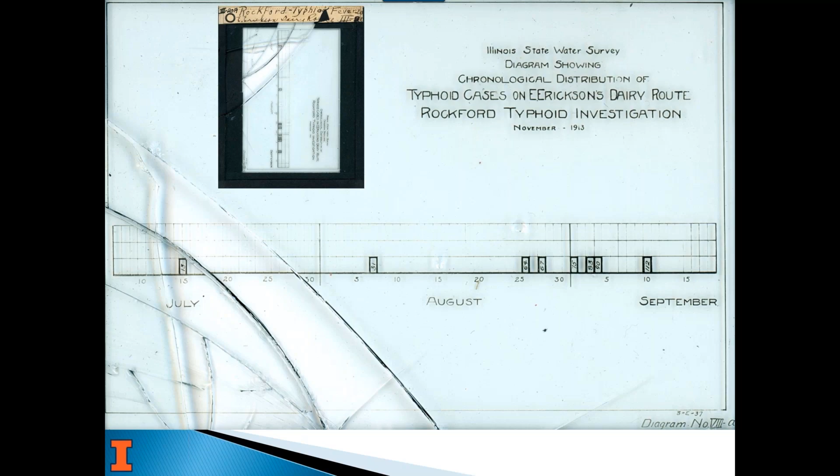We still do some of these types of projects. We're actually sampling some wells in Illinois for Legionella and lead, two separate projects, trying to get a handle on what kind of risks those might be for private well owners.

So what we're here to talk about today are private wells. Private wells aren't regulated after they're constructed, in general, in the country. There are a few local health districts in the Northeast where they may have some more authority after the wells are installed, or when there's a property transfer. But in general, it's up to the owner and user of the well to be sure your water's safe and the system's maintained. Whereas for a community water supply, even one on groundwater, like Champaign-Urbana, we have a water system.

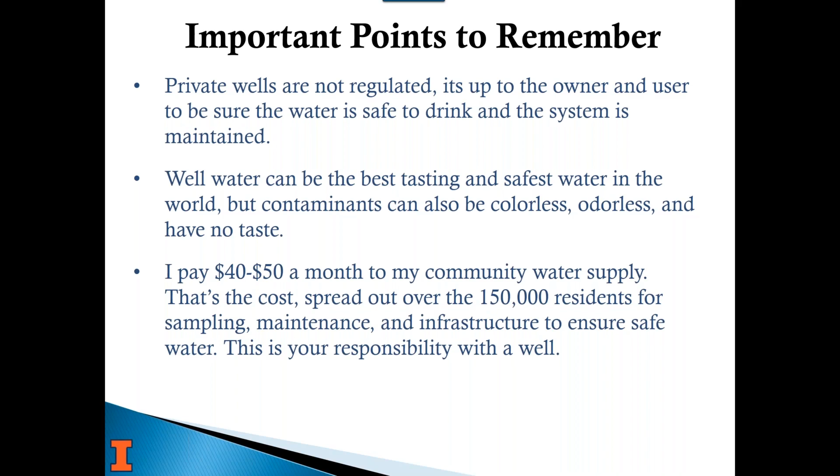But you need to do that for yourself. I grew up on a shallow dug well on a farm in central Illinois, and we had all kinds of problems. If it was a dry summer and we left a hose on in the horse tank, we'd run out of water. Or in the winter, if our power went out, our pipes might freeze because our pump was above the well, not buried in the ground. So there's just a lot of responsibilities if you're a well owner that you need to know and understand.

These are some of the big takeaways, if you will. You need to understand your well log, or your well, how deep it is, where the pump's set, if it has a screen or not. What type of well is it? Where's your water coming from? Is it coming from near the surface, or fairly deep? Well depth doesn't necessarily give you that answer, which I'll go through in a bit. You can have a really deep well that's still getting water from a shallow formation. So you need to understand those things.

As far as understanding if there are naturally occurring contaminants with your water source, your state agency, or maybe even your local health district or county health department, will know. For instance, we know there are areas in Illinois high in arsenic. Tazewell County is one of those. If you called the Tazewell County Health Department, they would recommend you test for arsenic, just because we know there's a lot of it in that particular aquifer that folks are using.

The other point of our class is to teach you enough about the basics related to your well, how it works, the geology, and how contaminants can get into a well, so that you learn to ask better questions, the right questions, and understand what your local sources of information might be, whether it's a driller, extension, a county health department, a lab, or a state agency like your state geological survey, your USGS office, or in Illinois, the water survey. The more you learn about your well and talk to folks who are interested in helping you, the better off you'll be.

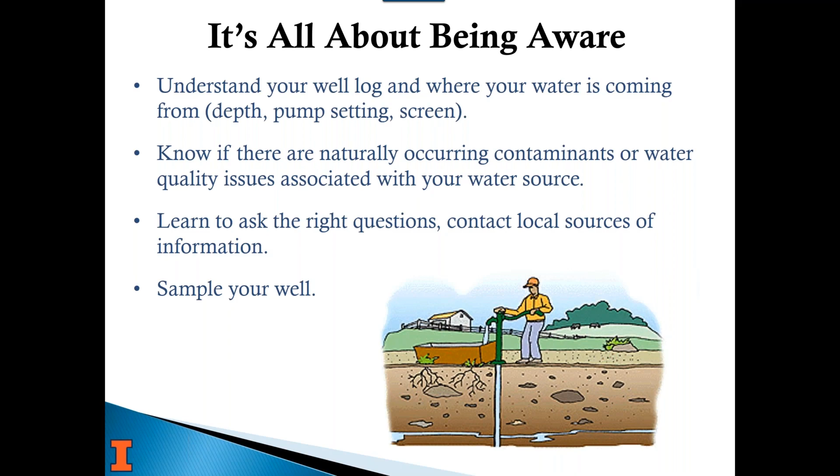So we're going to do a little bit of a geology lesson to start out today. This is about groundwater and wells. Porosity is one of the major terms used in describing how much water there is in a groundwater system, an aquifer, as well as how it might move through that system. If you had a box full of sand, the porosity is the volume of pore space, the area between the sand grains, divided by the total volume.

The best way to explain it: if I have a jar of sand that's full of fine sand, it might look completely full, but it actually has a porosity of nearly 30% if it's uniform sand. That means if I have a 100-foot thick aquifer of uniform sand and it's full of water, if I took all the sand away, there'd still be 30 feet of water there. A sand and gravel aquifer that's porous like that typically is a very good water supply if it's thick and completely saturated. It also depends on the size of the grains, how easy it is for water to move through that material. So that's a sand system.

A bedrock system, a fractured rock system, is different—water doesn't come from the rock itself. If I have a piece of granite in my hand, it has zero porosity, right? It's not the rock that's providing or storing water, it's the fractures in the rock. Now, one type of bedrock, especially sandstone, can have secondary porosity. You can have water stored in sandstone. It's not very much, but it provides a little more. It's basically cemented sand.

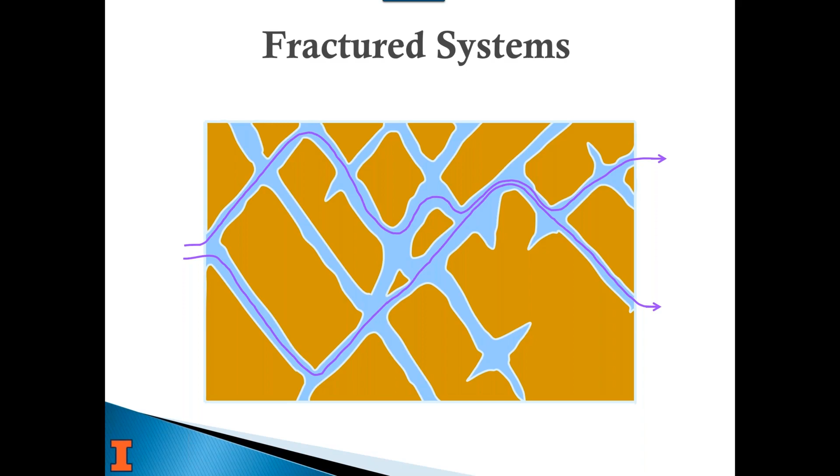But in general, water flow in bedrock aquifers is through the fractures. You'll see when we get to the part about how bedrock wells are built that this really matters. It's why you can't have a casing all the way down to the bottom with a bedrock system, because then the fractures get cut off as well. So, unconsolidated is a term meaning loose, like sand and gravel, and consolidated means rock.

Versus caverns in limestone. We have a lot of limestone in Southern Illinois, Indiana, Tennessee, Kentucky. It's where Mammoth Cave is. The limestone is more friable as far as it can be dissolved by water, and so that's why you have sinkholes and karst aquifers. You hear about that sometimes. That's usually limestone that's been weathered, and that's how caves are formed, and some of those are full of water, and so that makes them more interconnected and larger. But it also means that when you have a sinkhole at the surface, it's going straight down into that cavern, and it's causing contamination. So we see, for instance, Pike County, Illinois is all karst.

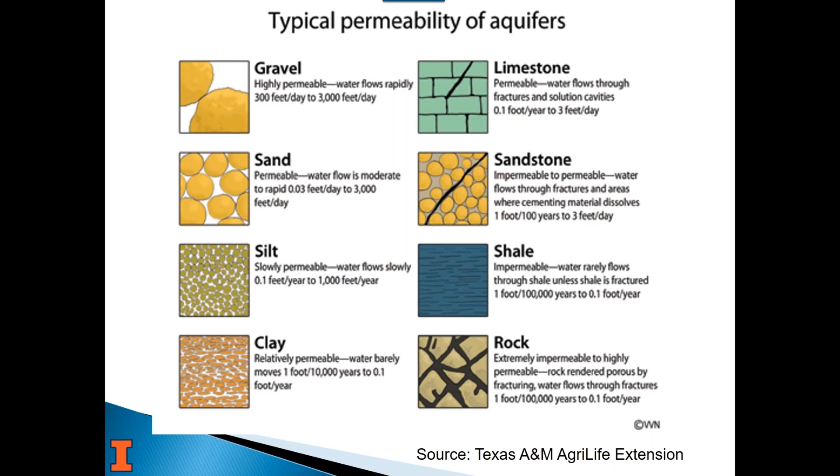And then, again, you're dependent on fractures, and this just gives you a range of how fast water can move through a system, just to give you an idea.

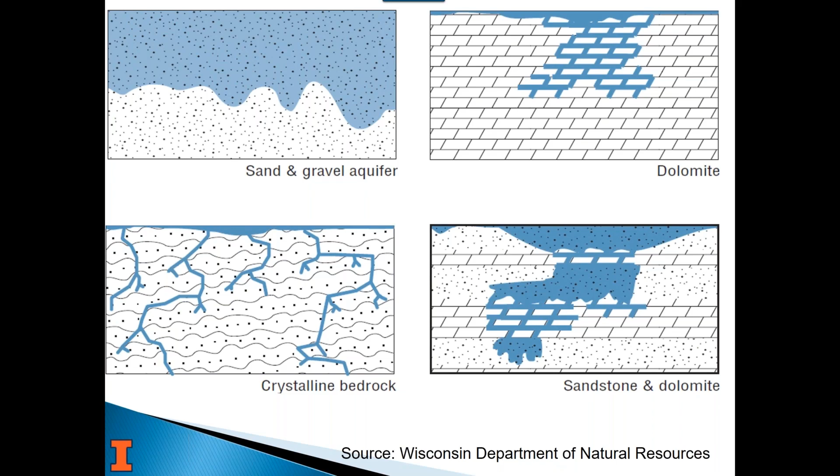But in real life, there's layers in bedrock, so sandstone and dolomite this shows, and this is still an idealized representation. Most geologic units in bedrock are not flat, they're angled one way or another, and they're not uniform thickness. They can be very thick in some places and very thin in others. And so that's why when you drill one well in an area and you hit 40 feet of sand and there's plenty of water, you could drill a mile away and there's no sand. Just the geology can change that fast.

You may not be familiar with it, but down by St. Louis, Missouri, that's the Mississippi. There's a moraine or a drop off about 8 miles from St. Louis in Illinois. As you're driving towards St. Louis, you drop off nearly 200 feet, and that's where the ancient Mississippi bank used to be when the glaciers were melting. It was 8 to 10 miles wide, and now it's less than a mile wide. You can see any river bottom, as you're driving through, you come down into the bottom ground of the lowlands around the river, that used to be all full of water and flowing. So when all that melting stopped, it filled with sand. That's why you have the glacial drift.

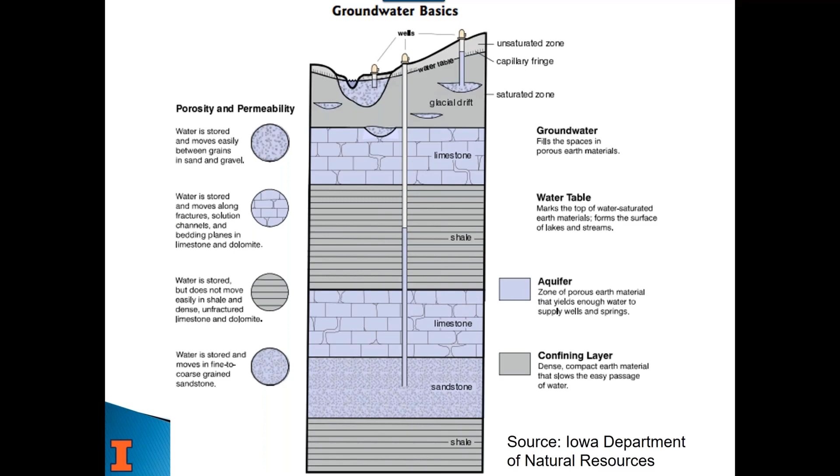So the shale again acts as a confining layer, and that's why water levels do what they like to do.

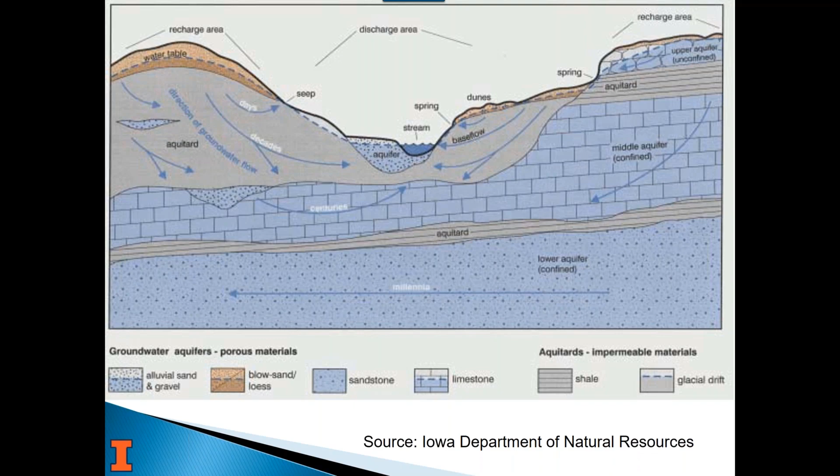And so that's why if you have some kind of water quality problem in a well, if it's in the aquifer itself, like arsenic can be, it's naturally occurring, you can't just treat your well and expect it to be okay. And that's a bad example because you don't treat the well, you treat the water. But it's always flowing, so more water's flowing towards your well. And then when you pump it, you lower the water level and that causes more water to flow to the well. Okay, so as far as aquifers and wells, there's really three types of wells.

The way we look at this, there's dug and bored wells, which are large diameter, and typically those go in where there is no real aquifer. So you don't have sand and gravel that makes up an aquifer, or you don't have bedrock that either has enough water or has water of a quality you can use. An example of that, in Southern Illinois, we have bedrock maybe 300 feet below land surface, and where there's plenty of water, it's all salt water from an ancient lake. The TDS is like 10,000, so it's salt water like ocean water. It's expensive to treat, so it's really not used as a water supply.

So in the southern third of Illinois, there are two major lakes that provide water to 15 or so counties and all the public water supplies. For the private well owners, they either have a dug or bored well, a shallow well, if there's enough material there to have a water table above bedrock, or they have a different source, a cistern, or they haul water, or there are a lot of rural water districts that have developed in southern Illinois because there's no good water source.

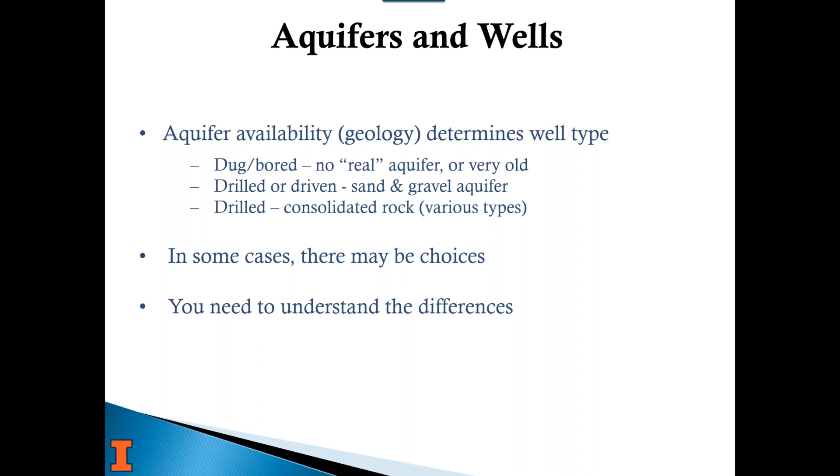For instance, a good example is in Wisconsin, there's one geologic unit that has very high arsenic, in the thousands, where the health standard is 10. So they passed a law that says you have to stay above that unit, or if you're going to drill through it, you can't finish a well in it. And if you're going to drill through it, you have to case it off so there's no chance that water from that unit can get in your well. So there's better water below and better water above, but this one unit is just very high in arsenic because of the source grain material that makes up the aquifer. It just depends on where you live, as a bottom line.

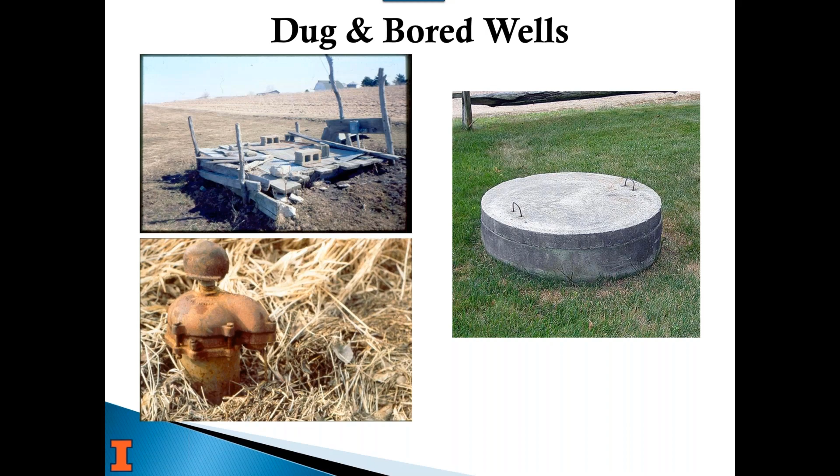Versus the well on the bottom left is also a large diameter well, but it has a riser pipe. So this concrete pad that you see on the right is 10 feet below land surface in the other example. And then there's an opening for that pipe, and you're able to fill that all in with clay and reduce the amount of opportunity for shallow infiltration to get in the well.

Water seeps in slowly. There's typically not enough water available. Most of this is fine textured material, which water can move through slowly, but that's it. So you have enough storage that when you use the water in the morning or in the evening, it lowers the water level in the well, and then it sits overnight or during the day when everybody's gone, and it fills back up. So the reason you have it 3-foot diameter or sometimes larger is just because it's like a cistern. It's meant to store water that seeps in slowly from our surrounding areas.

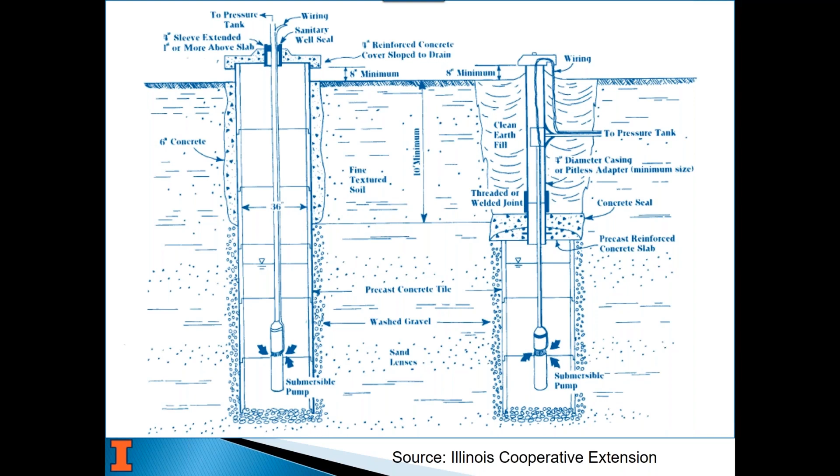So the other design on the right is where it looks like a drilled well at the top. It's got a regular well casing. In this case, they've got a pitless adapter, and this is an area where it'd be freezing. Then there's a concrete pad at 10 feet or lower, where it's still the same large diameter well where water can seep in. It's just done in a way that you put clean earth fill in the upper 10 feet above that concrete pad, so that there's less chance of surface material seeping down and getting in the well.

Okay, sand and gravel wells. So a sand and gravel well is finished in a sand and gravel aquifer, which is why you have a well screen, and this little picture here is a stainless steel well screen. So the screen lets the water in but keeps the sand out, okay? And so here's a diagram of what that looks like. Usually you have a well pump that's in the well, and water seeping in from the sand.

And when you start pumping this, the water level will drop in the well, and then water from the surrounding area, because it's at a higher level, is going to flow towards the lower level, like I mentioned earlier, and try to fill that back in. So because of the porosity of sand and gravel, it keeps filling in the well.

A lot of times you see in irrigation systems along river bottoms or in sandy areas, they're pumping 1,200 or 1,500 gallons a minute. So a lot of times the sand and gravel aquifer is very prolific.

The screen can be stainless steel or PVC. As far as screen size, the slots between each woven strand of stainless steel are sized based on the sand grains you find when you drill. You drill this well, catch the cuttings as the material comes up, and determine how coarse or fine the sand is, then size the screen appropriately so that it keeps the sand out but lets the water in. If you're in coarse gravel, you can have bigger slots. If you're in finer sand, they've got to be very narrow slots.

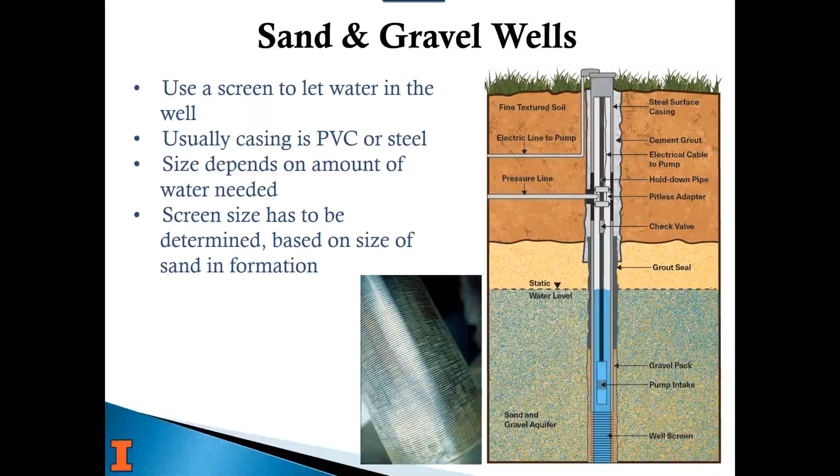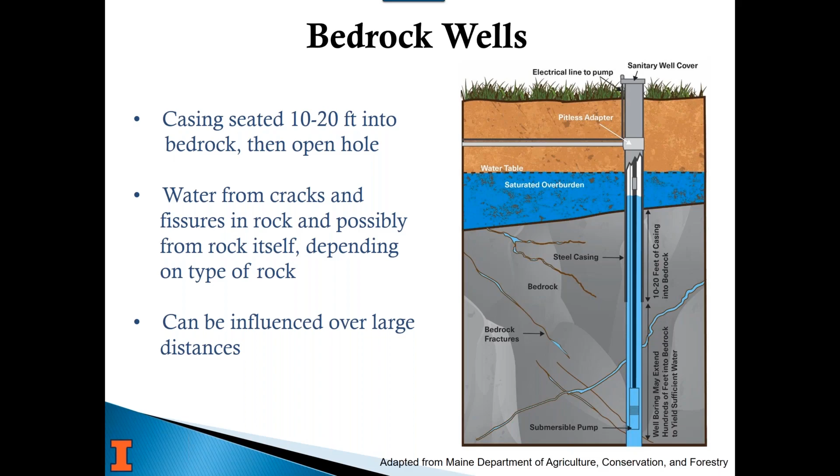And here's a bedrock well. You can see that if we look at the formation again, they had clay and a little bit of sand, then broken limestone at 189, and then 68 feet of limestone. Then they hit shale, so they basically stopped—they went 3 feet into shale and stopped.

If you look at number 15, they used 179 feet of PVC and then 20 feet of black steel, and they put the black steel at the bottom, 10 feet into the bedrock. The bedrock started at 189, so they went 10 feet into the rock and seated that steel casing, then put PVC on top. That's because PVC is easier to break, and when you're seating it in the rock you have to use some force to make it solid. So that's a typical way to save some money for the well owner—PVC is cheaper than steel, is the bottom line.

You can see here that the static level was 130 feet. When they pumped it at 25 gallons a minute for 2 hours, it dropped to 160 feet—still plenty of water, right? In fact, if you look at number 5 over here, in the end they put in a 12 gallon per minute pump, and they only set it at 160, because if you're pumping it half as hard, the drawdown is going to be less, so it shouldn't be an issue.

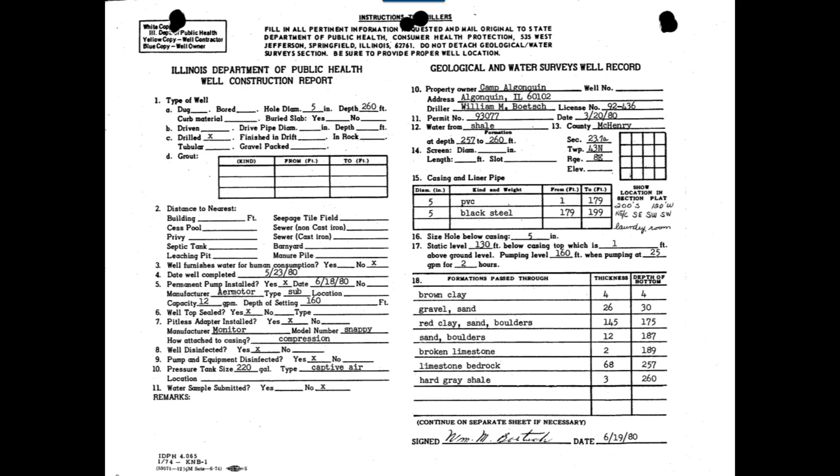Okay, so there's lots of issues. That comes down to really these things: public health protection, that's first and foremost, as well as source water protection, meaning protecting the aquifer and water supply you're using, and then understanding the water quality of the water you are using, whether that's a health concern or an aesthetic concern. Those are the things we really need to be concerned about.

There are tons of issues like drought, flooding, contamination, PFAS today that are in the news. And when those things happen, we tend to get more emails and requests and questions from well owners.

When people hear there's a boil order for a community, some well owners will even call the community and say, do I need to be worried about my well? It actually has nothing to do with their well, but some folks just don't get what a boil order is really for, and they assume it could mean the same aquifer they're using could be part of the problem, and it's not.

So those things are a moment though for all of us. If we get a call from someone, it's a teaching moment where we can explain more about it, explain other opportunities like our private well class, or if you have information of your own to provide to a well owner—and I'm talking to the professionals in our group here—it's a chance to at least explain all that information.

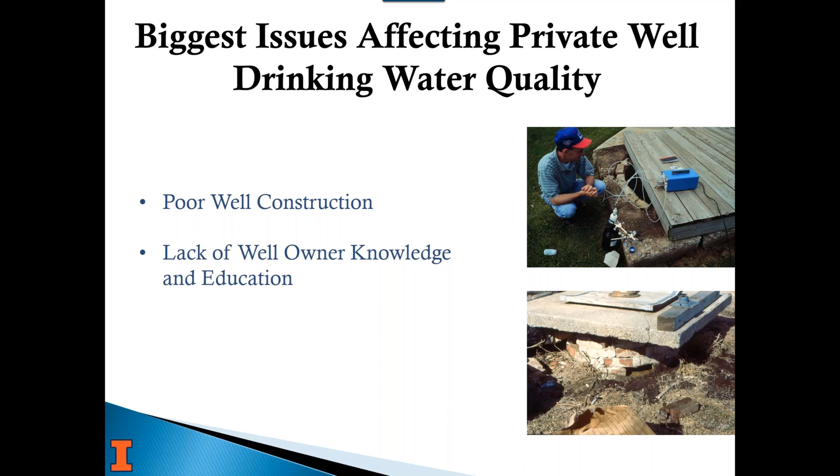And so we have that issue, where those old wells tend to be the ones where we have the most issues. It's also that a lot of folks who are on private wells just don't have the knowledge or education on how to be a well owner. We see a lot of people who call a community when there's a boil order. I've had community water operators tell me they've had well owners call them thinking they were on city water and not realizing they had a well in their front yard, and that's happened literally a bunch of times. Becoming more knowledgeable about your well and knowing the basics is really critical to keeping your water safe for your family. That's kind of the message today.

As far as old construction, if you can, you should correct it. Well construction codes have changed significantly in the past 30 plus years, but every existing well is grandfathered in. We still see wells in pits, we still see hand dug wells. The well I grew up on, my grandpa hand dug in 1933. It's only 14 feet deep, at the bottom of a ravine where water can run towards it from three sides, and it's in a pasture. It was never safe.

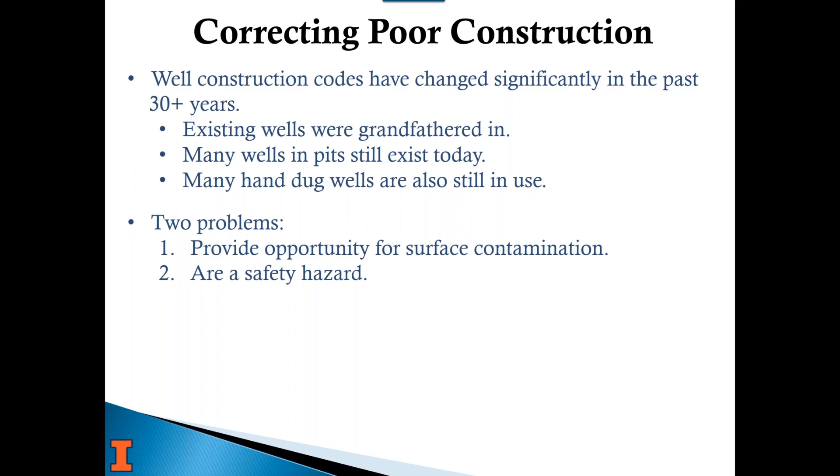My body got used to that water. When I came to college I started drinking city water that was chlorinated. I went home at Christmas and our well water made me sick. You just don't realize those things, but they're not safe. So not only are they a chance for contamination from the surface, but they're also a safety hazard.

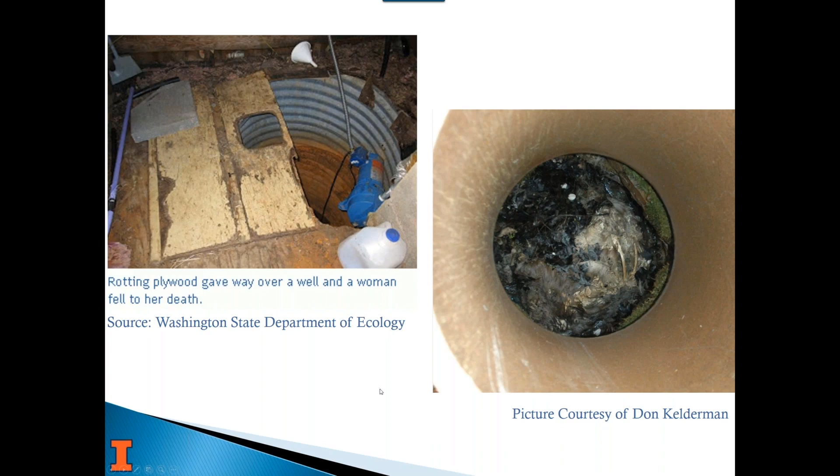So what should you do with these wells? Bring them up to code if you can. You can find out what the code is from your local health district or county health department, or it should be online with your state agency. Every state has a well construction code except two, Pennsylvania and Alaska, and Alaska's state agencies are all working together - they have a work group trying to change that. But even so, if you don't have a jurisdiction with recommendations for best practices or a well code, use somebody else's. Every other state does, and it's just the safer thing to do.

So, if your well's in a pit, extend the pipe up to the surface, and fill that in with clay grout or cement so that water can't seep in.

If you have a well in a pit, which we ran into back in 2011, I hired 4 geology students to inventory wells in 9 rural townships in a farming county of Illinois. They found 1,708 wells. We only had logs for about 750 of those. But we also found 40 wells that were still in pits.

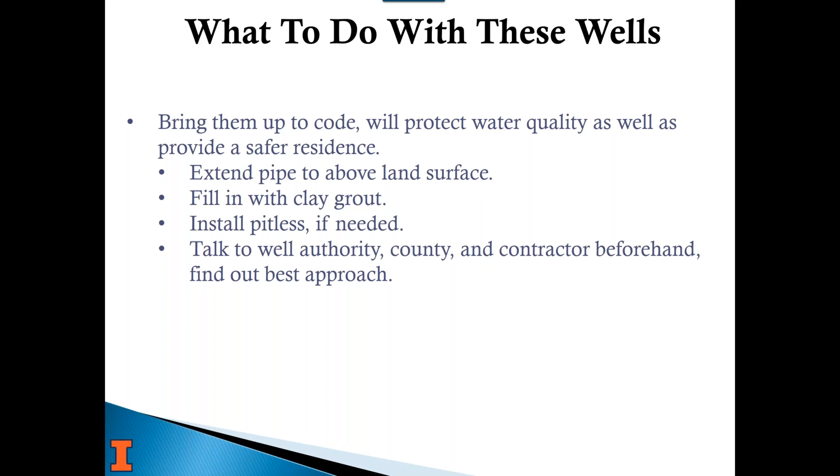Talk to a well contractor, your county, or even your extension about what to do to make that safer. The same thing goes for abandoned wells - there's probably as many abandoned wells out there that aren't used and need to be properly abandoned as there are wells that are actually in use. Because well logs weren't required in most states until sometime in the 60s to 80s, there's a lot of old wells that we don't have on file. The well I grew up on isn't even in our records here.

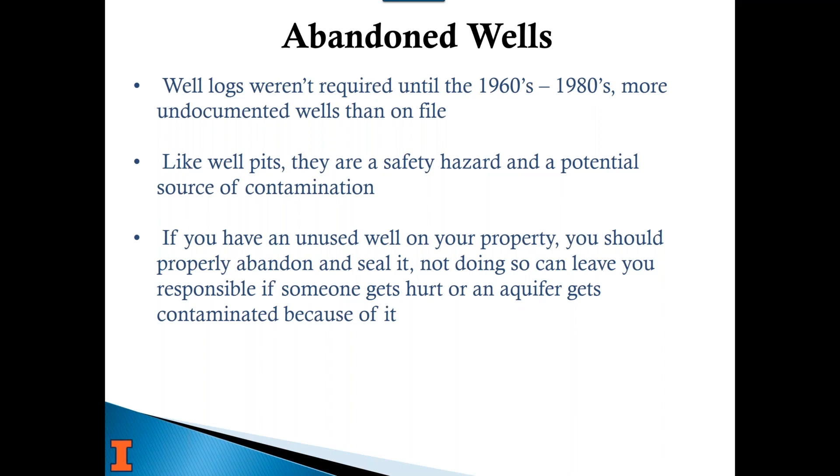Like wells in pits, old wells are a safety hazard. If somebody walks on your property and falls in an old well - whether you knew it was there, but maybe the plywood you had over top of it is 25 years old now and rotten - you might be responsible if they get hurt or killed. Or people dump stuff down into it, since it's a nice hole in the ground, out of sight, out of mind. Well, if it contaminates an aquifer, you could be responsible. This happens more than you think.

Or you see where people get a tractor stuck, the tire gets stuck - a lot of things happen with these old wells. Okay, so we're going to talk a little bit about the difference between aquifers and aquitards and some of those things in water flow.

An aquifer is a saturated bed formation or group of geologic formations that yields sufficient quantity of water. In my field, they argue about what an aquifer actually is or isn't. If you have a very thin aquifer that you can maybe get 5 to 10 gallons a minute out of, that's an aquifer for a private well owner. But for a community that needs a 200 or 400 gallon per minute well, that wouldn't be an aquifer for them. So how you want to define that is really up to you, but it's basically a unit that provides water of sufficient quantity.

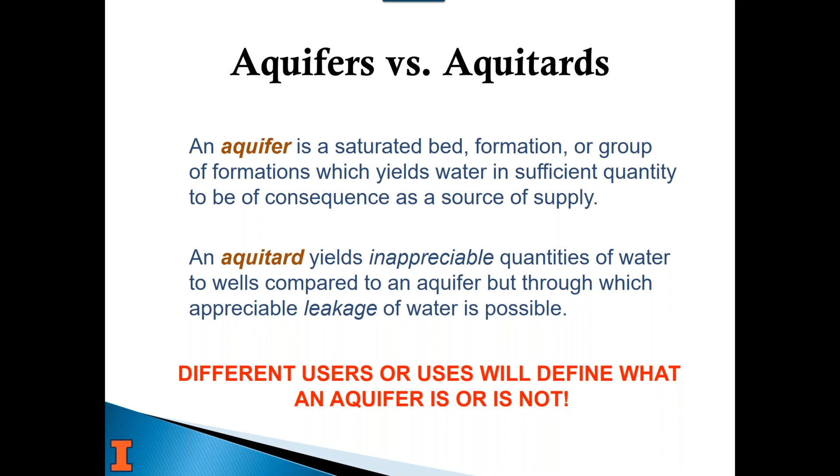That's versus an aquitard, which doesn't yield sufficient quantities of water, like silt, clay, or shale. It also lets appreciable leakage through, meaning it retards the flow of water. Different users and uses will define what an aquifer is or isn't - that's kind of the scientific definition. It's not a big deal as far as how you might look at it on your property. But geology is different everywhere - you're not guaranteed water just because you put in a well.

And so it's good to know what you might have available. If you really want to learn about the geology of your area, your state geological survey is probably the place to go. Or in Illinois, it could be either our geological survey or water survey. And I know from our own efforts, if someone calls us, we're more than open to trying to help them understand where they're at, what data we might have available, all those sorts of things.

So confined versus unconfined. An unconfined aquifer is where the groundwater has a free surface. So if we look at a jar of sand and we put water in just halfway up the sand, the top part of the sand is still not saturated, but there's a line where the water becomes saturated—that's the water table.

And the same thing happens in the ground. In some areas, if you're digging a foundation, you may have to get a contractor's pump and keep the water pumped out because the water table is really shallow, and even though it's not sandy material, it's still saturated. So water, when it infiltrates, reaches a point where it's saturated—that's the water table. That's not necessarily in a sand and gravel aquifer. The water table is the top of the aquifer.

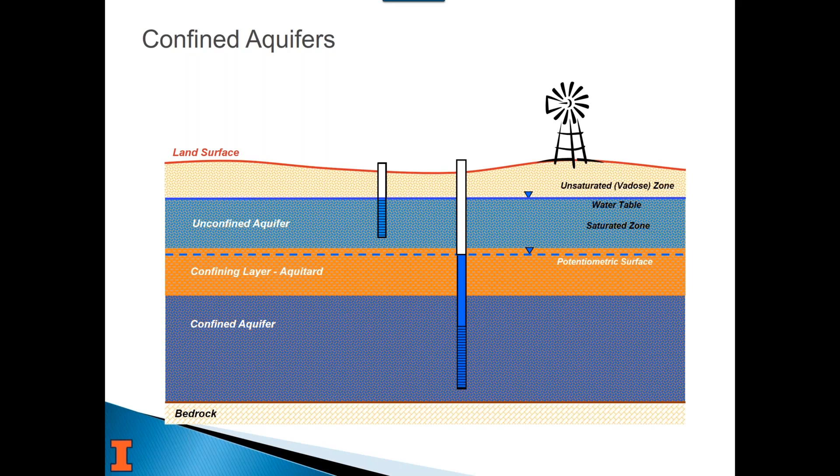So what that means is that confining layer, that aquitard—a clay or a shale, whatever it might be—the water level above it is higher than below it. And so there's a net movement, very slowly, through the aquitard going down. But it's also possible to have this reversed, where the deeper aquifer has a higher water level than the shallow one. Then the water is trying to move, because it's pressure, it's pushing up. It has more influence and it moves very slowly. It doesn't provide a lot of water, but it wants to be even—they want to be at the same level. And so that's what happens.

So here's an aquifer that's confined—that's what the little dashed lines mean. And there's a separate water table up there. But where it's black, and the little triangle is the water level, you have an artesian well because the water level's above the aquifer. So the whole aquifer is completely saturated, and it's got pressure on it. Think of it like if this was a big juice box and I squeezed it—water would come up the straw to a certain point. If I squeeze hard enough, it's going to come out the top, right? So it can be below the water table, it can be above the water table, or it can be flowing.

An interesting fact—Michigan has a really great handbook on flowing wells, called the Michigan Flowing Well Handbook. They were losing 28 million gallons of groundwater a day to flowing wells that weren't capped. So they passed a law in Michigan that every flowing well had to be capped, and that basically keeps the water from escaping on the ground. By doing that, you create water pressure in your line before you even get it to your pressure tank—it's kind of interesting.

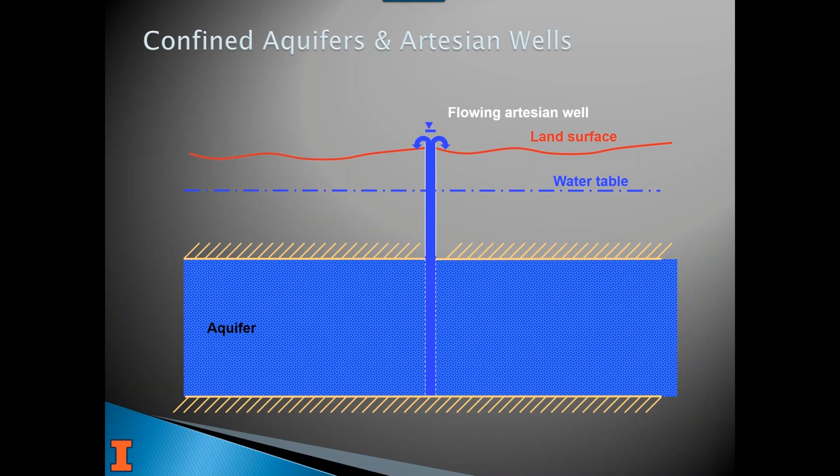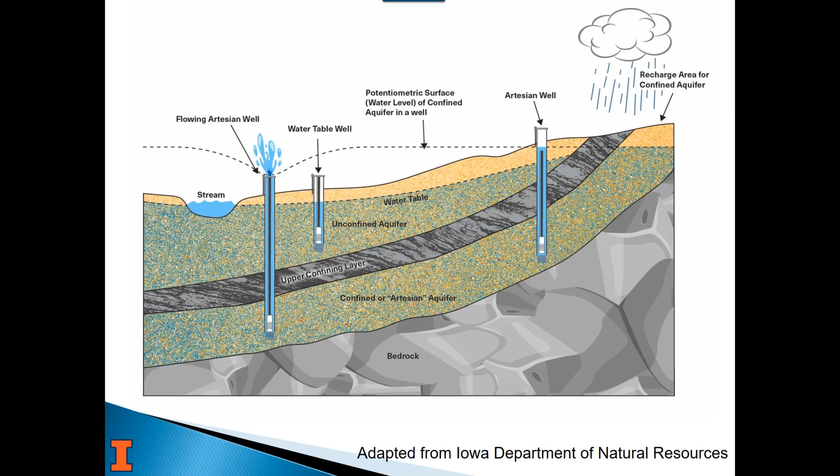So this is very typical along any major river. You can have more than one confining layer separating these aquifers, and because of that the water levels can be different, and it can be whether it's artesian or flowing artesian. That just means it's under pressure.

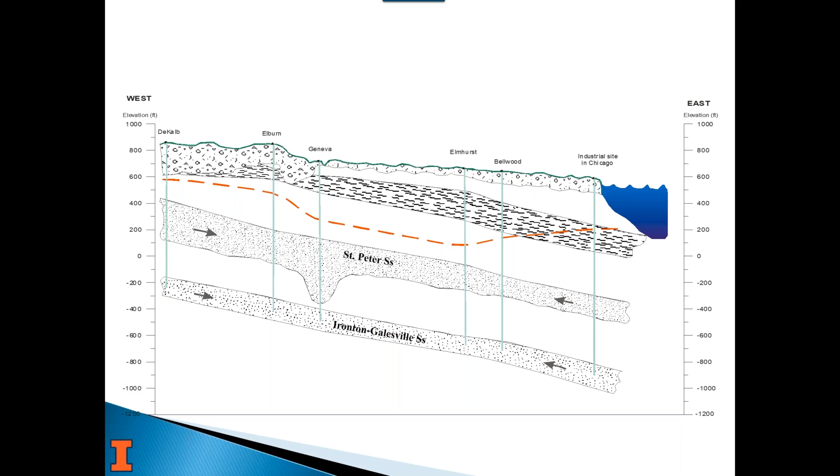When you pump water out of a well, you lower the water level right at the well, so everywhere surrounding it tries to fill in to make it flat again, like in your bathtub. That's why this looks like it does, and the water's flowing both directions. It looks like it's flowing downhill, but really it's flowing to a lower pressure.

So it might be very small, it might not draw down very much. We have an aquifer that's so extensive that when we pumped it at - 2 million gallons a day, that's about 1,400 gallons a minute.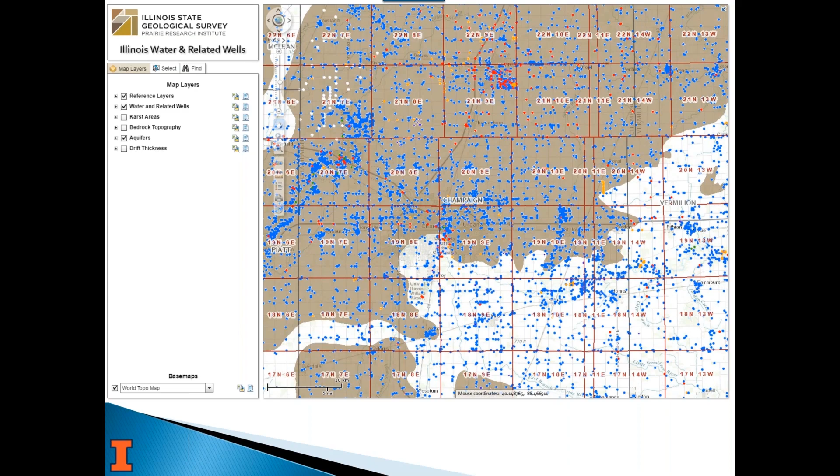If I zoom in closer and click on a well, there's actually 3 wells here, and I'm looking at the second of the 3, that's 269, by Willard Airport just south of town, drilled in 1959. This says it's 269 feet deep, and there's an API number, which is the Geological Survey's number, and then the Water Survey also has a P number.

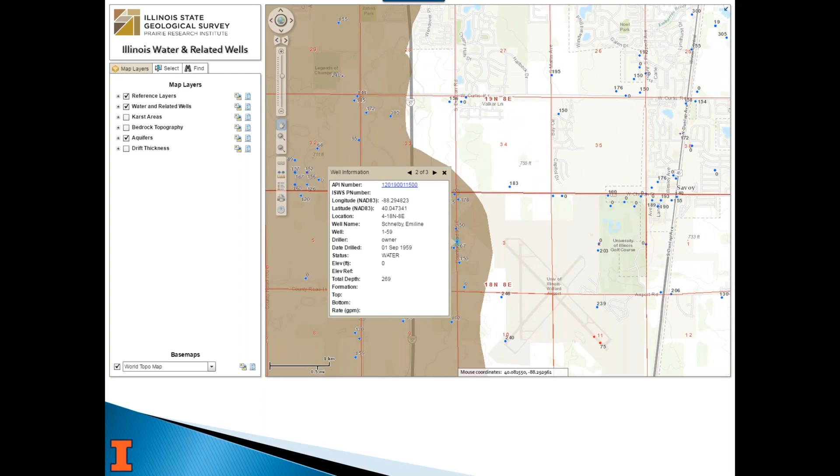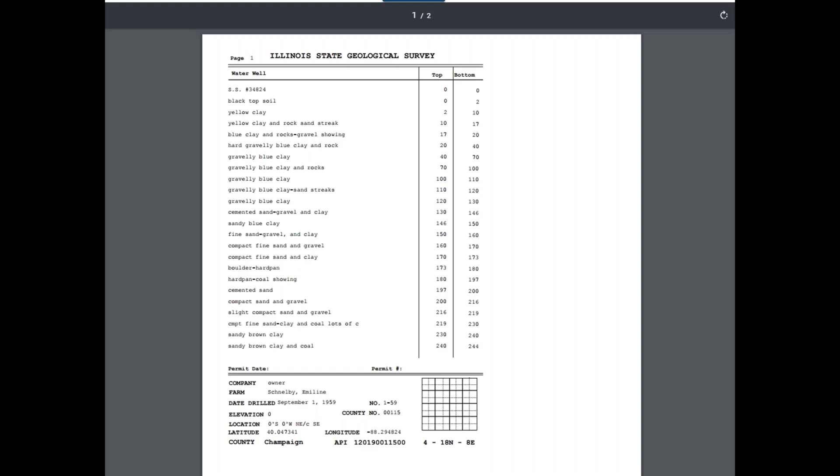I looked at a different well, clicked on that blue number, and it gave me this, one of the other wells there. This one's 244 feet deep, and this is a generated log from the Geological Survey. They've entered all this geology, and it shows up on their website. If you go to a different log, some also have links to the scanned original well log, and that's the Water Survey's job.

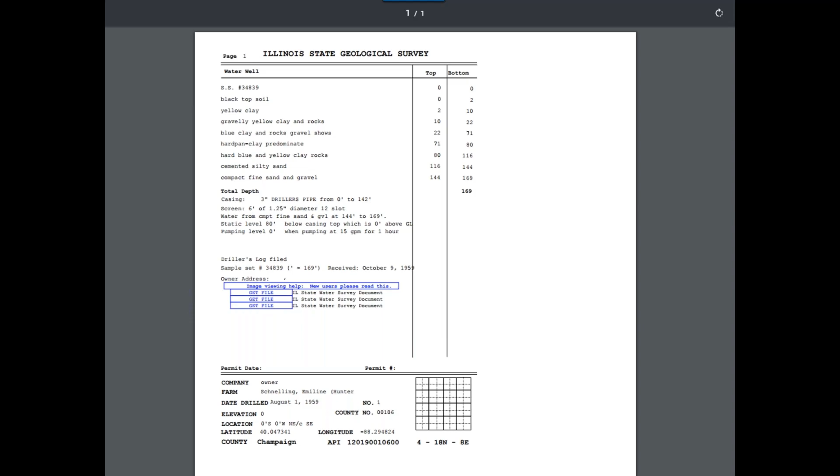So we scan all the logs as they were originally written and have files of those. This particular well, which is only 169 feet deep, is at nearly the same location and has images available from the Water Survey, 3 different ones. If I click on one of those blue boxes, I get an image of the actual well log.

This one was handwritten. The one I showed you before was typed, but this is from 1968. It's 169 feet deep. They put in a 5-foot concrete pit before they put in the well. I don't think that pit's there anymore, but you can see that they pumped it at 15 gallons a minute for 2 hours, and the water level dropped from 91.6 feet to 117.6 feet.

The aquifer is actually in that lower 25.5 feet, from the formation they're using to the 169. So there's a 7-foot screen that's a 12 and 10 slot screen. We've went through that before. So that's what I have on groundwater and wells.

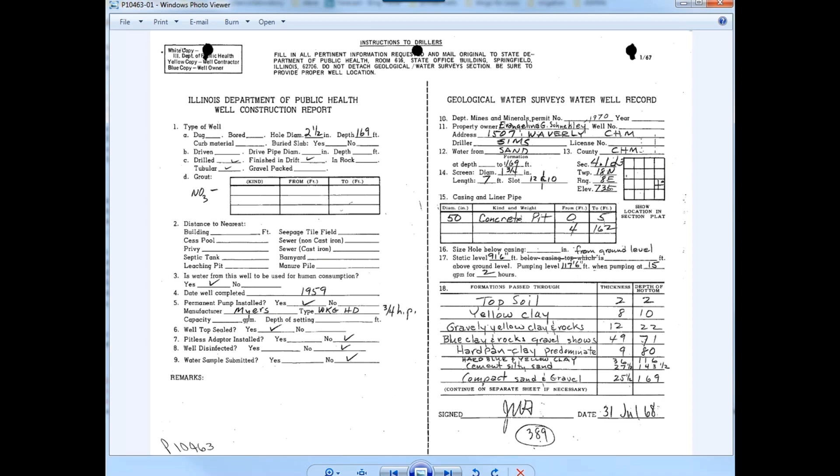I do want to talk a little bit about private well class before we get to our questions. It's a set of 10 lessons, self-paced. You go to privatewellclass.org, click on sign up for the class. It'll ask for your email, first name, and what state you live in. Then you'll get an email once a week for 10 weeks with a PDF attached that goes through the 10 different lessons. This is the front page, and you take our free class by clicking on that.

For each lesson, like the first lesson called The Science of Groundwater, we link to other resources that might be beneficial. Each lesson is 6 to 10 pages long, and in the end it's about 75 pages total for all 10 lessons. If there's other material, or if something didn't resonate with you, you can look at these other resources, all from vetted agencies or universities, containing a lot of good information on wells.

I mentioned the Michigan Flowing Well Handbook, which is described under lesson 2, with a link to it. It's a great document. If you're in an area that has flowing wells—we only have a couple areas like that in Illinois, pretty small—it's a great tool to understand the types of well caps you need and all those things to actually seal that and keep it from flowing.

The webinar, like we're doing today, is recorded. Under webinars and events, there's a past webinars button. This one we did in October, and again you can go through the whole thing—it's on YouTube. You can watch it full screen.

Usually every July we do a septic system webinar, Septic System 101. We had to do it in August this year, just the way things worked out, but we only do it once a year. It's really useful if you're concerned about your septic system and understanding it. I know we have a septic question today or two, which I'll answer later.

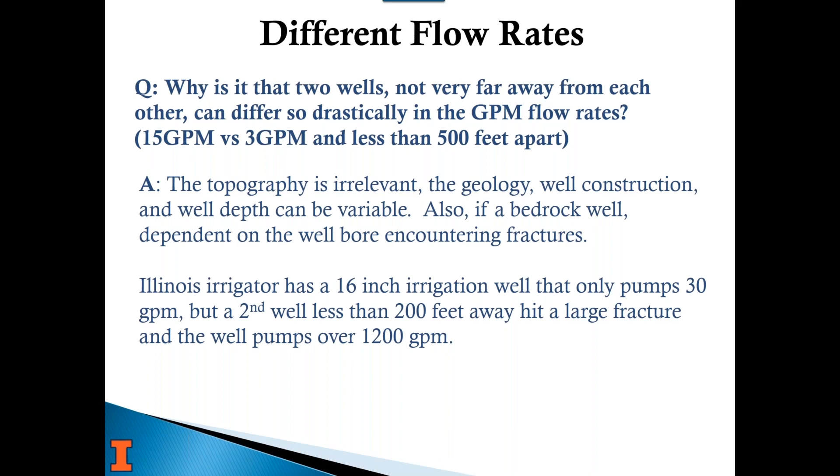There's an irrigator up in Kankakee County, Illinois that I worked with. We did a big irrigation study back in the late 80s where he put in a 16-inch well, 400 feet deep, that only pumped 30 gallons a minute. He was trying to put in an irrigation well but missed every big fracture available. He moved over 200 feet, hit a large fracture, and now has an irrigation well that pumps over 1,200 gallons a minute. So it really depends on where you drill - there can be a lot of variability. I'm going to assume these are bedrock wells, but 15 to 3 isn't unusual - it could just be a difference in one additional fracture that one well hits and the other doesn't. If they're not bedrock wells, I'd need more information. But if they're really identical wells in the same unit, that's probably what's going on.

Is the quality of water better in deeper wells? There were several questions about deeper wells, or comments like someone told me that deeper wells are always better or have better water quality. We talk about wells being deeper as being more favorable, and that's basically - all other conditions being equal - a deeper source is better protected from the surface. But as I explained in the bedrock example, having a deeper well doesn't mean anything if you only have 40 feet to 20 feet of casing.

Two wells that are 200 feet deep could be very different if one's sand and gravel and all the water's coming in from 195 to 200 feet below land surface where the screen is, versus the bedrock well that's 200 feet deep, where water can come in from 30 feet at the edge of where the casing stops down to 200. So it really matters about the geology and the well type, and how much casing there is, all that sort of stuff.

It doesn't necessarily mean the quality of the water is better either, because you can have naturally occurring contaminants in deep aquifers like arsenic, uranium, radon, that you might not have in an unconfined shallower aquifer. So it's not always the case - it's just that, in theory, a deeper well would be further away from surface contamination, and that's kind of where that idea comes from. You also need to know if the well is properly constructed or grouted. So I think I've answered that.

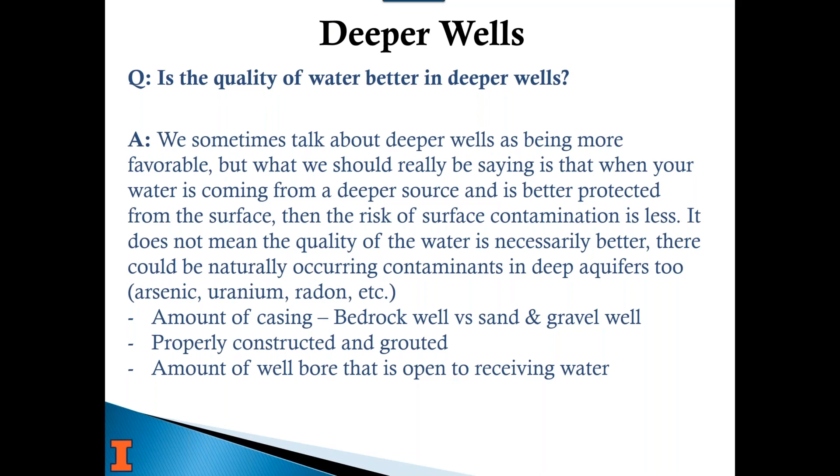A developer will be digging and changing grading 20 feet from our wellhead - should we be concerned about this causing structural or water quality problems? I'm really not sure about the structural problems. It's not likely, unless it's rock and they're going to be dynamiting or something like that - then there'd be maybe some issues to worry about.

But even a lot of vibration could cause water quality changes. As an extreme example, we had a monitoring well in Southern Illinois where there was a small earthquake down in Missouri, and it changed the water level in our well by 4 feet. Whatever changed between all the connections and fractures in the rock lowered our well 4 feet, and it stayed that way. How that changed the water chemistry - it could have. This isn't a well we monitor for water quality, but if it's a different water source, or there's a different percentage of water coming from different fractures, it could change the chemistry just because of the natural rock material and what it's made up of.

So the best thing we think you should do is go ahead and take a water sample for inorganics and metals before they do any work, then do a follow-up one a few weeks later. You could also see some cloudy water - we've seen folks near a quarry where they've dynamited have cloudy water for a few days. It doesn't necessarily mean there's going to be any changes in water quality - it could have just disturbed something, so you're pulling water that's got some unconsolidated soil mixed up and dissolved in it, causing some cloudiness. But again, testing is really the best way to determine that.

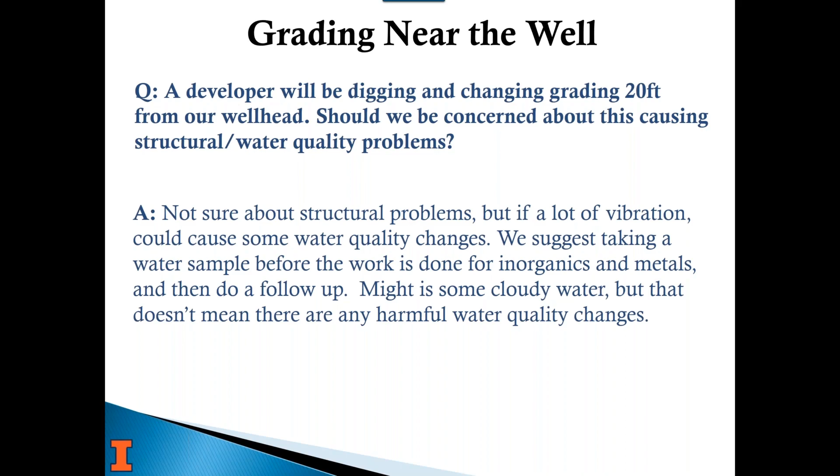So we've had a number of questions about treatment. Someone asked about UV, someone asked about hardness and nitrate, and several others.

A few years ago, Minnesota Department of Health put together this guide called Home Water Treatment. Katie, maybe you can put this link in the chat, but even if not, you can Google it and find it. It's really an awesome summary of everything you want to ask about basic treatment based on what constituents and what kind of treatment you're looking at. If you just Google Minnesota Home Water Treatment, it should come up. It'll come to a page, and then you can download the PDF. It goes step by step on why you're doing this.

It talks about, if you're going to have treatment, you should have one that has these three labels: NSF, the National Sanitation Foundation, the gold seal from the Water Quality Association, or the certified UL water quality symbol. Those are third-party certifiers, meaning that whatever company made this treatment device had NSF, WQA, or UL test it and prove that it removes the constituents it's listed as removing. So if it's an arsenic device, if it's got those symbols on it, they're verifying that this treatment equipment will actually remove so much arsenic based on the standards they tested it at.

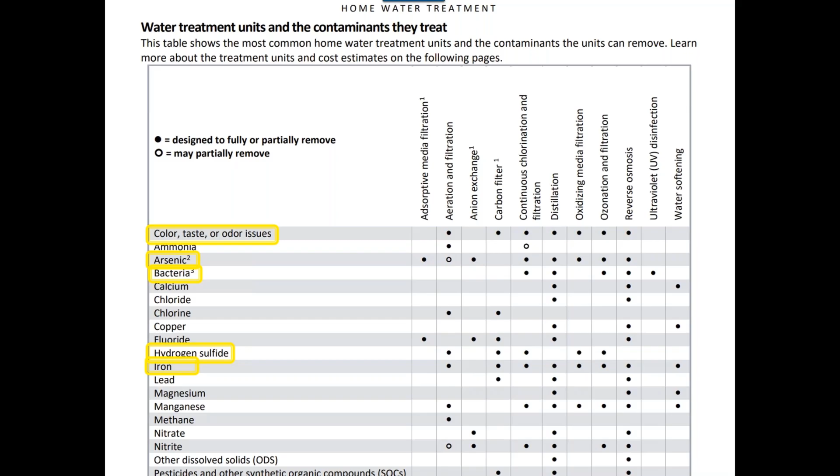As you go through this document, it lists all the constituents going down in rows, and the columns are the different kinds of treatment that'll treat it. For instance, for hydrogen sulfide, there's a number: aeration, continuous chlorination and filtration. Further down, it explains what each of those processes are, how much, even what the pros and cons are, if it takes a lot of water, if you have to add stuff, the costs, initial cost, and whether it's point of use or point of entry.

One comment I'll make about point of use versus point of entry: be sure that there's a really good reason to need a point of entry treatment device. Point of use means right where you're using the water, so that would be like a lead filter on a kitchen tap or an RO unit under your kitchen sink. Point of entry means where it enters your house, so you're treating every drop of water that comes into your home, for your toilet, for your shower, for your dishwasher. There are very few contaminants where you'd need point of entry.

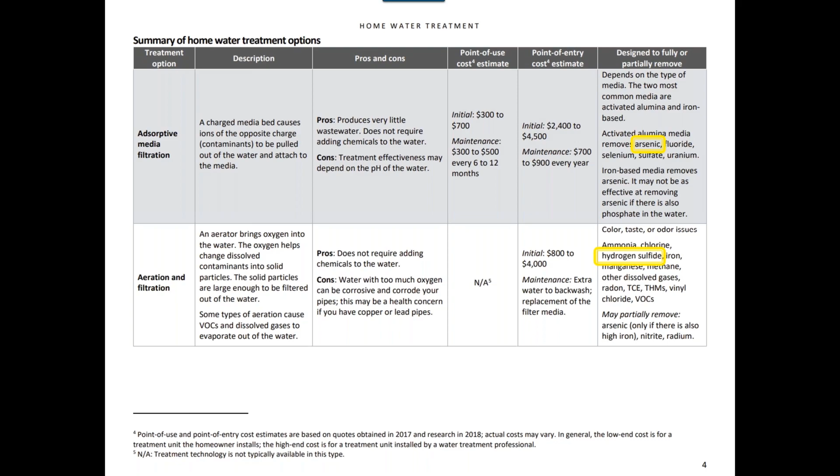I've run across cases in the Northeast where folks have been sold a point of entry arsenic treatment device. There is no reason to have a point of entry treatment device for arsenic if you need to treat the water you're drinking and cooking with. It won't hurt you in the shower—it has to be really high, more than you typically see in groundwater. If it is really high, in the thousands, then maybe ask a health professional if it's a dermal risk or whatever. But we talked to Minnesota Department of Health, and they agreed that for arsenic, you don't need a point of entry device. It's just a lot of extra money and a lot of wasted water. So that's the one thing I'll say there.

So yeah, it goes through this—carbon filters are great for taste and hydrogen sulfide and things like that. RO, down at the bottom, is a membrane. Any particle larger than a certain size won't go through it, so it removes a lot of things, including nitrate. I know one of the questions was, what's the best way to remove nitrate? RO is a good way to do that.

So anyway, it's a really great, well-developed document that should get most people on their way. It's also good if someone comes to your house and does a pH test and says, oh, your pH is this or whatever, you really need this, this, and this. You can go look at this document and go, well, why would I need an RO unit if it's just for that?

It prevents you from being sold something you don't need. I've run into more than one well owner who I went to their house to do a well assessment, and they have $5,000 to $10,000 of treatment equipment in their basement. I'm like, oh, what was in your water? We've never tested. So they were worried about it, and someone came to their house selling treatment equipment, and they went ahead and spent all that money, even though they'd never really tested to see what might be in their water. So do your due diligence. Most treatment professionals are reputable, but like in any profession, there are a few that aren't.

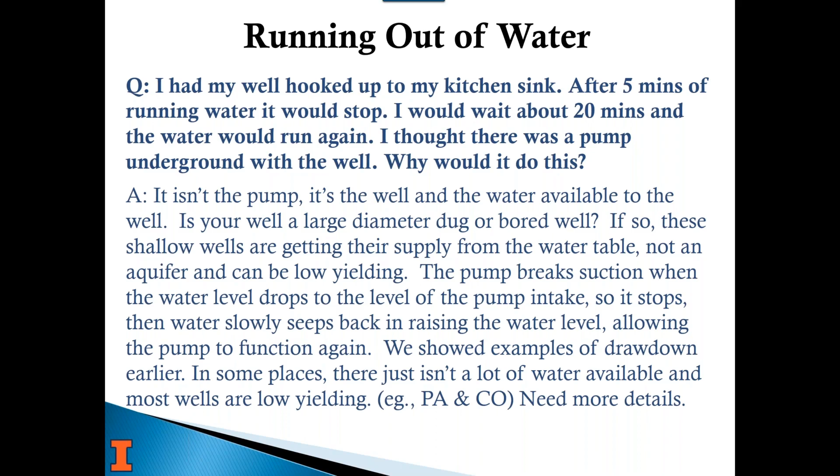Sandpoint wells. What is the life expectancy for a sandpoint well? To me, it's really not about life expectancy, it's about whether a sandpoint can provide a safe water supply. A number of states don't allow them anymore. In Illinois, there are sandpoints, but they've changed the law. It says you can install your own well in Illinois, you don't have to use a well contractor, but it still has to meet our construction code, and sandpoints don't.

They're risky because they're typically in areas where there's a shallow water table and it's sandy, so there's plenty of water available. But because it's sandy, you also have a lot of surface infiltration. So every time it rains, every time there's any kind of spill, anything liquid runs right down into the water table where you're pumping your water. Typically when we sample a sandpoint, it's contaminated either with nitrate or possibly bacteria, and they're just not a safe water supply. There's no grout, there's no gravel pack. They're getting water typically from less than 20 feet below land surface, and it's just not a safe water supply.

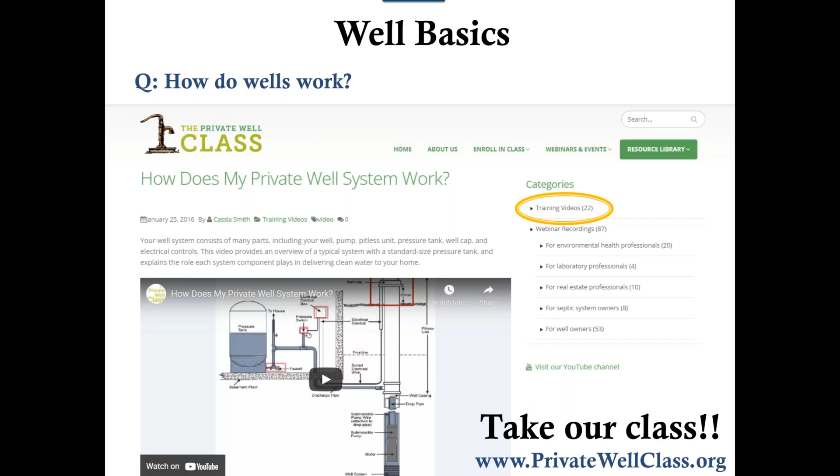It snaps in place and connects the vertical pipe from your drop pipe coming up with the discharge line going into your house, down below the frost line. But it's still your casing - same steel or PVC casing, whatever it might be - and it just sits in place there, locked in. But then you have a piece of pipe that you can just pull out, and then pull your pump out without having to mess with your discharge line.

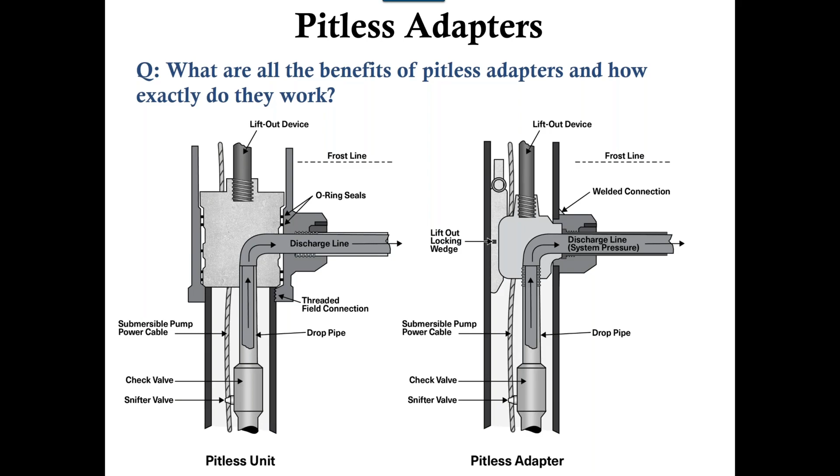I work for a local health department. I've been seeing well drillers not grouting the entire annular space on their well logs, which is a violation of our regs. Can you go over the health concerns that can happen from improper grouting?

Well, certainly improper grouting is a bad thing. So when you drill a well, say you drill an 8-inch hole and put in a 5-inch casing, the area between the outside of the hole and the outside of the well casing is called the annulus. You put grout in there, which is an impermeable material - clay, cement, a slurry, or sometimes clay pellets - used to seal that so water can't run down the outside of your well casing, down the hole you drilled, and get into your water.

So what I said here, you may not agree with, but your code is your code. A lot of places don't require continuous grouting over the entire interval of your well. But whether you need a fully grouted annulus really depends on the geology and how much of a risk that is.

In Nebraska, and in some areas, if you're grouting where the aquitard is, you can use gravel where the aquifer is, and it can't get through that aquitard. Different jurisdictions do things differently. But as far as improper grouting, if you don't have grout in the right place or enough of it, you run the risk of water running down the annulus and getting into your well or into the aquifer from the surface. That's the whole point of proper well construction: nothing from the surface can get in your well.

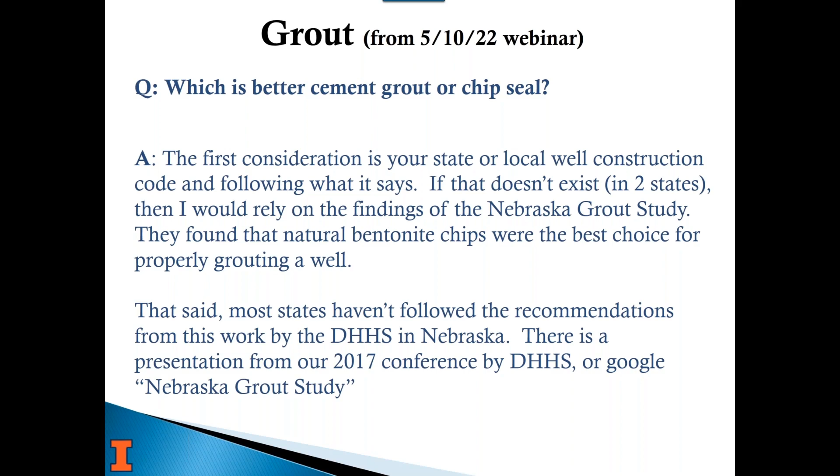Backwashing a calcite filter - how often should a system backwash, assuming calcite is the medium? People use calcite filters to raise the pH of water when it's naturally low. If you have a pH of 5 or 6, you can use a calcite filter to bring it up, and that's important for corrosion. Community water supplies put in polyphosphates to raise the pH of their water if it's low, so you don't have corrosion of lead or copper from lead solder, lead pipes, or copper pipes.

Backwashing is how you clean that filter out after it starts getting full - you run water the opposite direction, that sort of thing. The best advice I can give you is to find out who manufactured your filter, find their website, and find what information you need, because it's all there. I went to one company's website, and based on the tank size and the volume of calcite and those things, it tells you what your backwash rate should be and how often. But as far as how often to backwash, you need to ask the company that made your equipment.

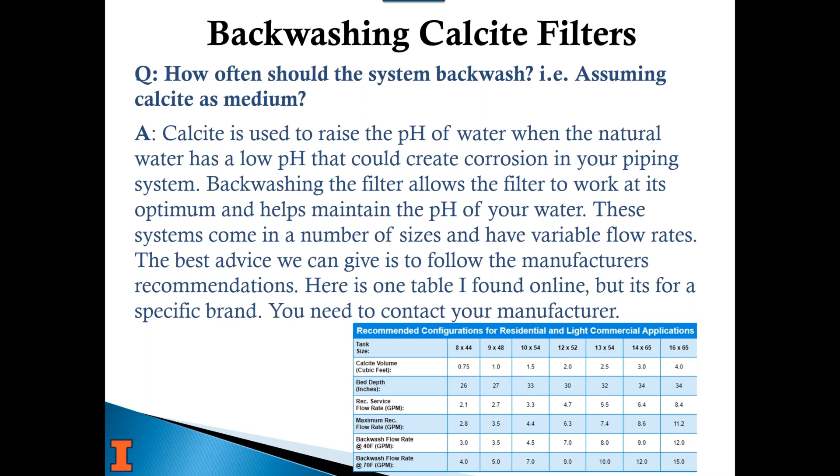That's the best approach. If you go to the Water Quality Association's website, you might be able to find the information for the treatment equipment you have. They have a list of a lot of those things, like instruction manuals, in case you don't have that. But my advice would be to contact the manufacturer. There are a number of questions like well water treatment information - I gave you some in the home treatment document.

Site selection for a well, basic well 101 info, what affects groundwater contamination, pros and cons of starting a well on your property, and how wells work.

Really, those are all open-ended questions, right? You need to take our class. That's the best way to answer each of those.

For starting a well, if you're going to drill a well, we have a list of questions you should ask a driller, things you need to make sure are in the contract. We have people who tell us the well driller won't give them their well log. You need to have it in the contract you sign with your driller that they're going to give you a copy of the well log, because sometimes you're in areas where there's a lot of competition among drilling contractors, and they guard that information as closely as they can. But you should always make sure you get a well log.

Things like that are all in our lessons, and you really need to take the class and go through and read all the material.

What testing, if any, is conducted on groundwater on a site before a well can be placed? There's usually no testing in advance, because you need a well to collect a water sample. If there's not one already there, there may be other information available. Talk to your state geological survey or a resource agency that deals with private wells. They can tell you what kind of aquifers are in the area, and if there are other well logs. So if you're in Illinois, you can look up the State Geological Survey's page that I showed you, and look at other well logs to see what's there.

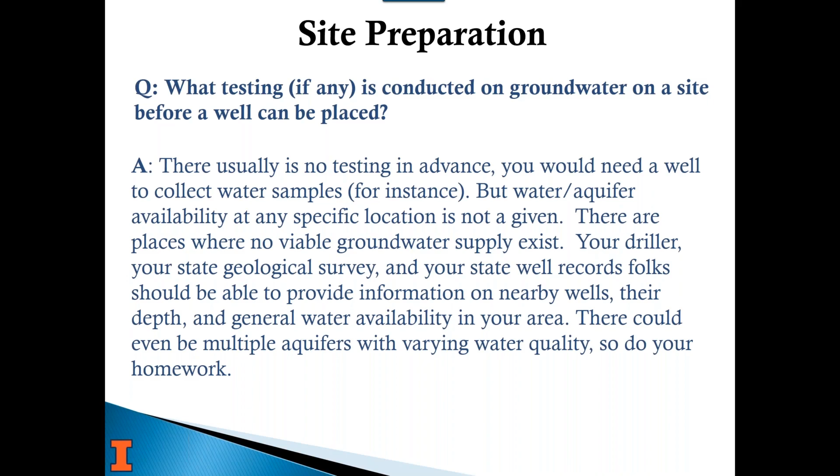You can contact the water survey and find out if we have any water quality information near you. Your driller, nearby drillers, State Geological Survey, and state well record folks should be able to provide information on nearby wells, their depth, general water availability, and in some cases, like ours, water quality information. We've sampled over 28,000 wells in Illinois over the last 50 years or so. You could find multiple aquifers with varying water quality, because that happens. So there isn't anything done in advance, but to be prepared before you do anything, you should find out all the information you can. Nearby wells are a great resource for that.

When bacteria and/or elevated nitrates are detected in well water, is it presumed to be a symptom of compromised well integrity? Aside from identifying an inadequate well cap or covers, or obvious casing damage, which we've talked about before, is it worth further well or septic inspection with a downhole camera, or is it preferable to treat or filter the water? I want to say this is an excellent, informed question, because you've mentioned a lot of things we usually say on these webinars. It's not necessarily presumed that it's a symptom of compromised well integrity.

So you can look and identify if there's a breach in the well near the surface, if the cap's not there, if it's an old well like some of the ones we showed pictures of, then clearly that's why you have bacteria in your well.

But as far as putting a camera in your well, you need to do your homework first. Are there any nearby sources? Is there a feedlot? How close is the septic system? And I'm assuming disinfection didn't work, because a lot of times if there's bacteria in your well, we may not know why it got in there, but once you chlorinate it, it goes away. You can test regularly to find out, and if it doesn't come back, then there's not a source.

If it's a shallow, large diameter well or a sand point, those are more likely to have that sort of thing. But as far as treatment versus a camera, most of the time if you've tried chlorinating or disinfecting and it didn't work, and you've done that a couple times, then really treatment is your solution. I'd only camera a well when nothing else makes sense and there's no clear reason you can come up with, and that's going to be a rarity.

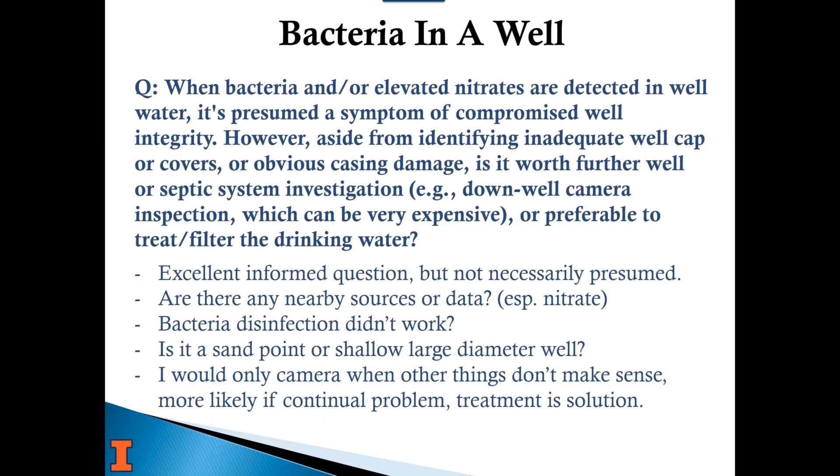So this is, I think, the last slide. I apologize, it's already 3.

Finding mixed information about what I can, should, or shouldn't discharge into my septic. I get different advice and information from different people. I summarize this because it was a whole slide long question in the end.

Some states have laws on whether you can put backwash into a septic system. Some states don't allow you to put softener backwash into it. So you should check that out first.

But in general, what we tell people is your septic system works best if you put less into it, so that the bacteria can work longer and grow better in the septic tank, especially backwash. It depends on what the chemistry is. I know part of your question mentioned an acid neutralizer or something—you don't want to put that in your septic tank where you're growing bacteria to get rid of your waste. So the bottom line is we suggest not adding any backwash, and finding another way to discharge that.

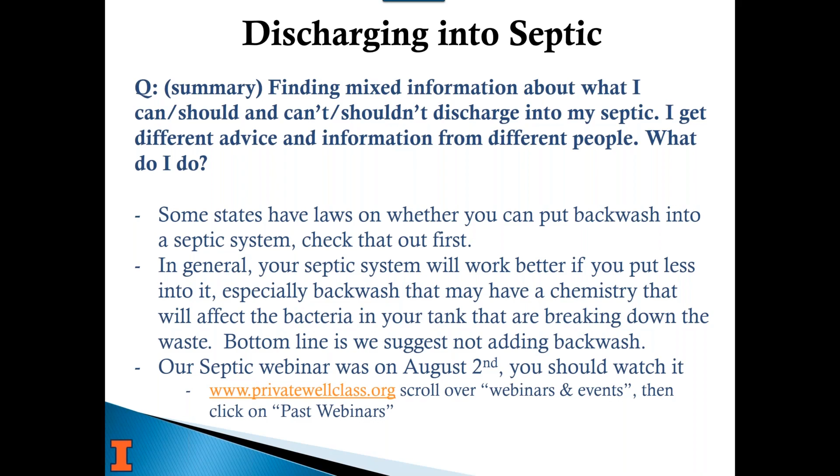I think you'll get a lot of good information there, but we certainly recommend not putting backwash, or even your sump or your hot tub water, through your septic. None of that should go through it because it just doesn't give the bugs time to break things down when you're running that much water through it.

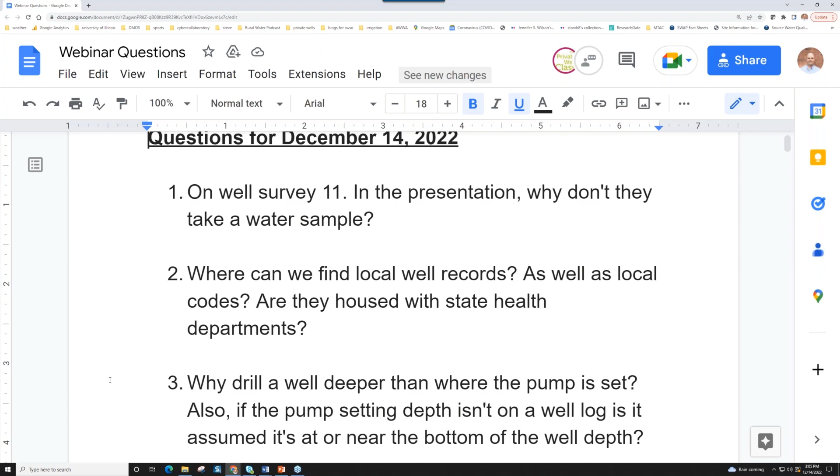So one, the assessment's free. The idea initially was to help folks understand their well better and give them advice and recommendations, but there wasn't funding in our program to provide sampling. Now that's changed—RCAP does about 400 or so assessments every year around the country in total, and it includes a water sample. Each region does their own, so they use different labs, and they may do slightly different constituents, but you'd want to talk to one of the RCAP folks because they do take a water sample now and pay for it. Hopefully you understand, if you're doing 400 well assessments, that's quite a chunk of change to pay for 400 comprehensive water analyses covering inorganics and metals. So that's why, for the well assessments I've done, I didn't include that—I don't have any money to pay for that, it's not part of the program we have. Their funding just doesn't cover everything we would like to do. Hopefully that answers your question.

Where can we find local well records as well as local codes? Are they housed within state health departments? Well, it depends on your state. In Illinois, it's the Illinois Department of Public Health—it's a state agency, and there's a state well code, and that's where I would start. I would start with my state water well logs. If you do that in Wisconsin, you're going to get the DNR. In Missouri, you're going to get DNR. In Minnesota, you're going to get the Department of Public Health. In New York, you're going to get the Department of Public Health. In Washington, you're going to get the Department of Ecology.

From there, you can find the folks who can give you that information. Some states have that on a nice interactive map, like we do. Some don't, some you have to request it. California for a long time didn't allow anyone to get a well log from a county health department but the person who owned the property. Now they've changed that, and all their records are open and available to anyone, which is the way it should be, and the way it is in Illinois. So it's really variable, but your local health district or county health department should be able to tell you if they have well records or where you need to get them. That's where I'd start, one of those two places.

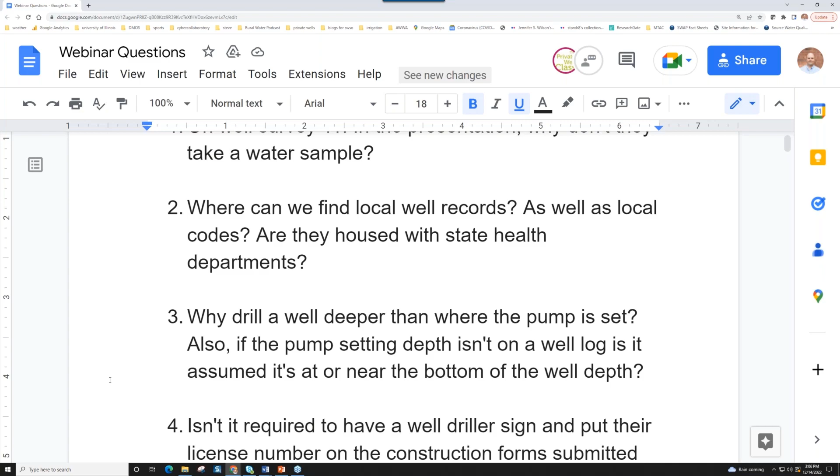Why drill a well deeper than where the pump is set? Also, if the pump setting depth isn't on a well log, is it assumed that it's at or near the bottom of the well depth? Usually you put the pump only as deep into the water as far as you need to know that it's not ever going to go dry.

For instance, in Champaign County where I live, if you have a 300-foot well into the Mahomet Aquifer, the water level might be 60 feet. It's a very prolific aquifer, 150 feet thick, sand and gravel. If I pump it at 10 gallons a minute, I might draw it down 2 feet. So there's no sense putting the pump down at 300 feet when the water level is never going to go below 65, maybe, or if there's a lot of pumpage from nearby sources or the irrigation wells go in, it might go down to 100. So maybe I put it at 120 feet.

But you never put your pump down in the bottom of a well because silt, sediment, sometimes a little sand gets in your well and sits at the bottom, and you're stirring that up. So your water is going to be cloudy or have dissolved solids in it, or maybe actual solids. Your well screen is sized based on laminar flow into the well from the outside, going through the gravel pack and the well screen. If you put your pump right down in the screen, that would cause much higher velocity flow through the screen, and it could sort your gravel pack and let more fines and fine sand get into your well. So you never put your pump at the total bottom because of sediment, or if you have a screen, it should always be 5 or 10 feet above it to prevent the gravel pack from being disrupted and potentially letting finer material through the screen. Hopefully that answers your question.

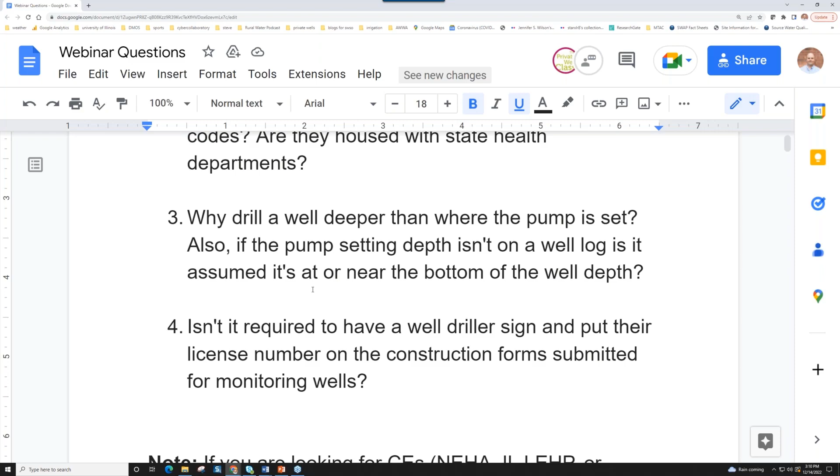Yeah, Katie, did I miss anything? No, I think you're good, Steve. Okay, well, thank you everybody, and we'll see you next year.